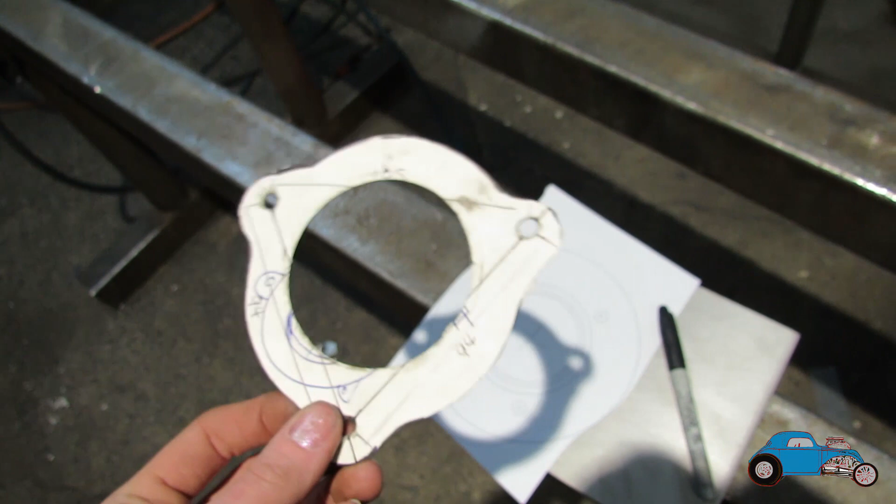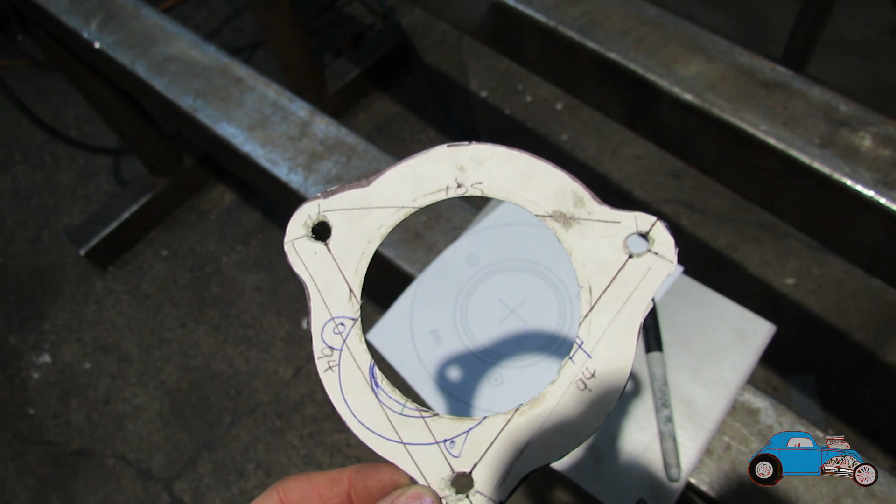I've just took a pattern of the turbo flange, just drawn it up on a bit of cardboard. The holes on this are actually slightly different, so we've got 94mm between two of them, and then we've got 105mm between these two as well. So I've just drawn this up and got it all on CAD, and I've got the drawing just here.

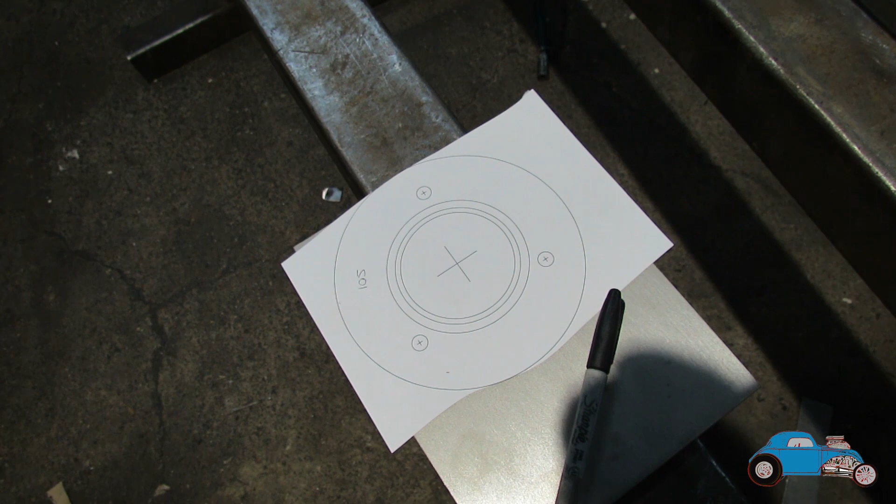I'm just going to copy this onto the bit of stainless that we've got, and that will make our turbo flange. I've also drawn into this a 90mm circle, and that will be the basis, or where we're going to put a bit of 90mm pipe on, and then we can machine the centre out. That will make sure that it's all central. So we'll just tack that onto the plate, and then we can put it in the lathe and bore the centre out to go over our flange on the turbo properly.

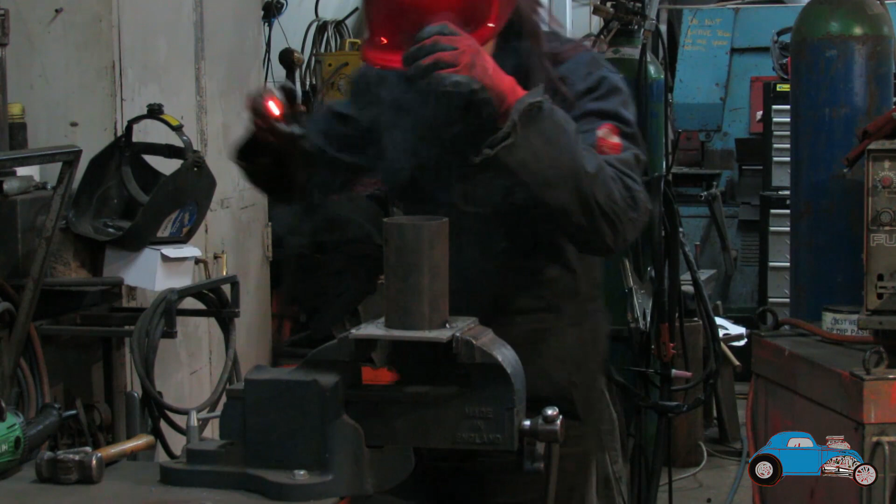That should hold it now so that we can bore the centre out.

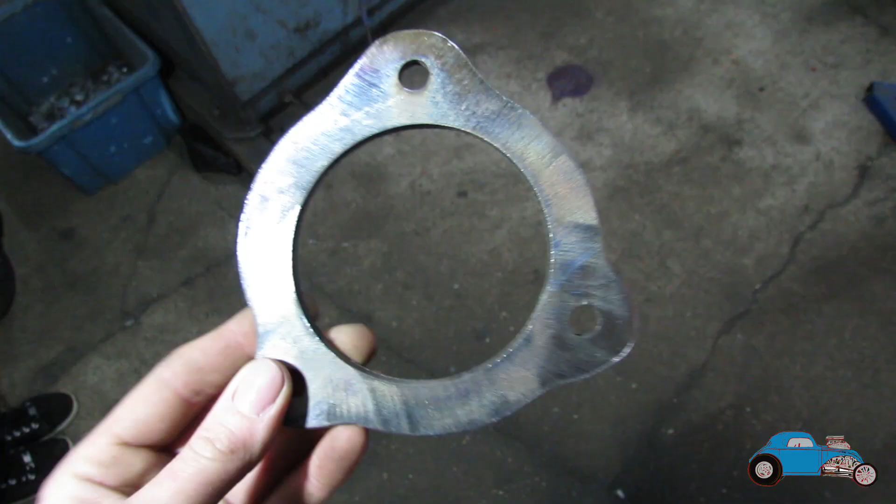I've got the turbo flange all bolted up now, and we've just been having a look at it, and we've decided that we just don't think it's thick enough. We made it out of 6mm stainless because that's all we had in stock, and we're now thinking it's probably not going to be thick enough because there was still part of the shoulder left on the stud when I bolted it up. I think what we're going to do is get all the exhaust and everything made up and together, and then get the exhaust fabricated, and then we'll have a new one laser cut.

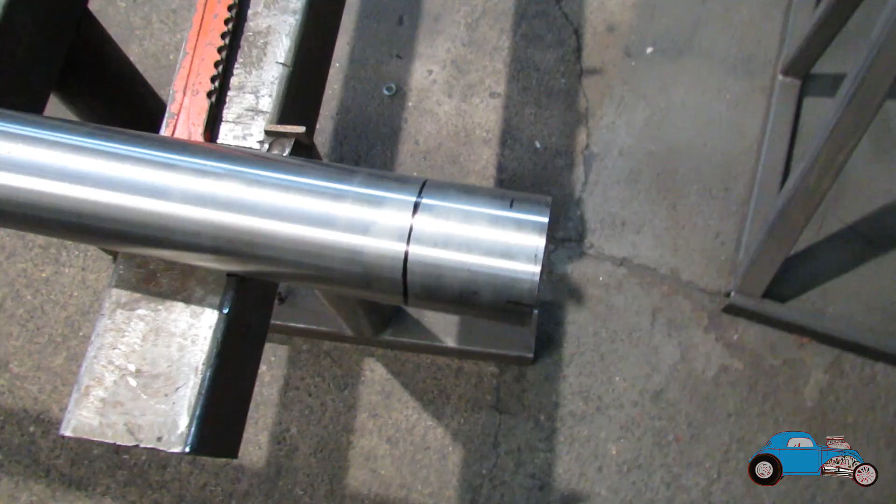Now we're going to cut the bit of stainless pipe. The size of the 3-inch is 76mm, and the hole in the middle of the flange that goes on the turbo is 80mm, so we've got a bit of a size difference there. So what we're going to do is give this a whirl, put this cone on here, and try to swell the end over, maybe press it. We'll see how we get on with that.

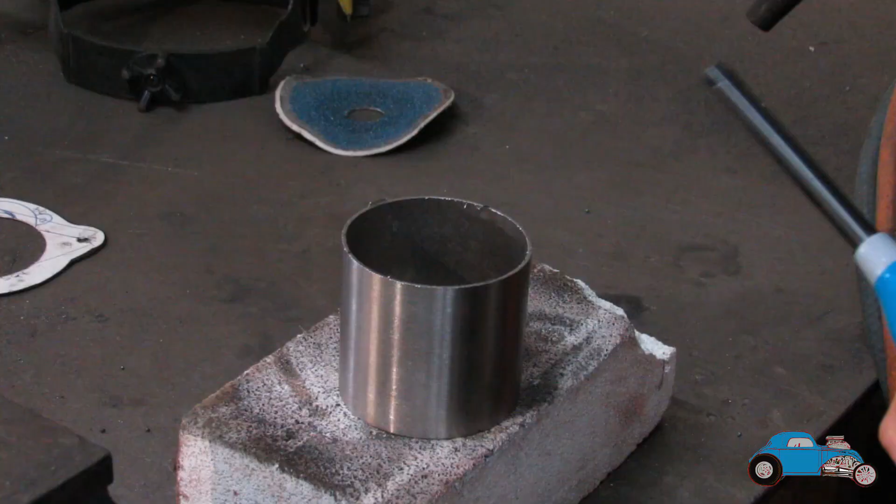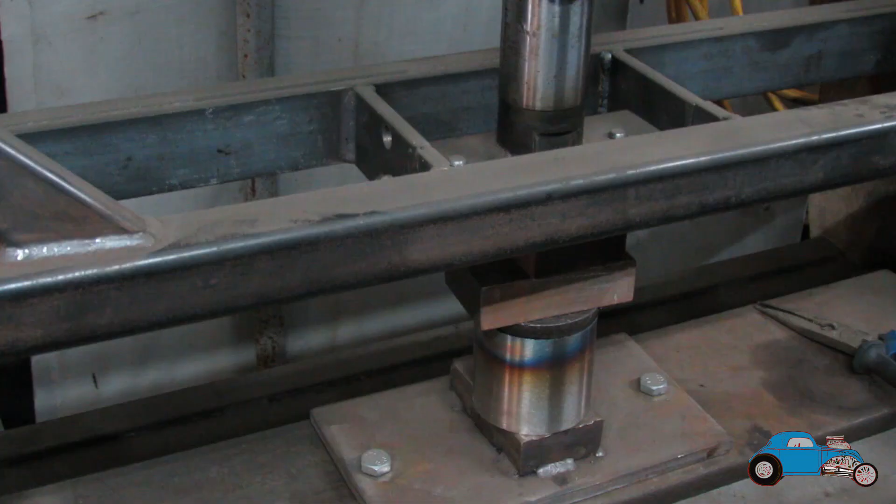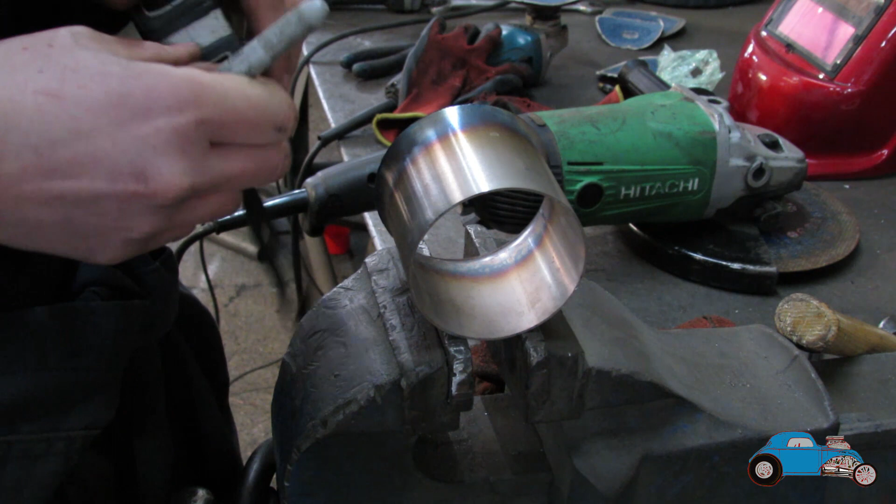Just checked it against the flange for the turbo and it all seems okay. So I think now I'm going to mark it out. We need it to have a bit more of an angle, so it'll bring it round towards the gearbox way, so it'll miss the steering column. We need about 40mm on the outside and 20mm on the inside.

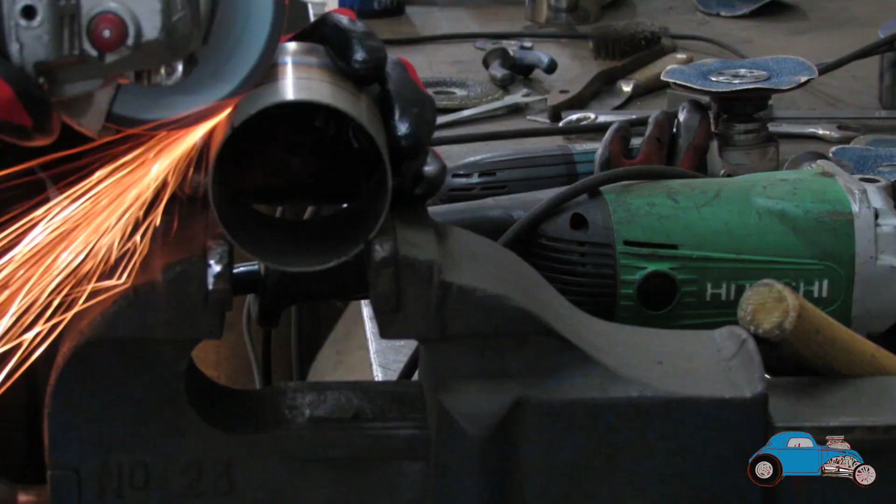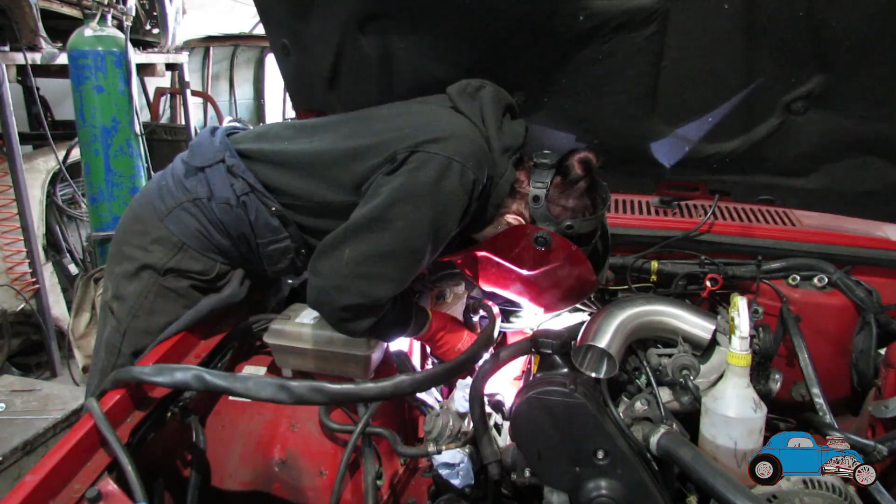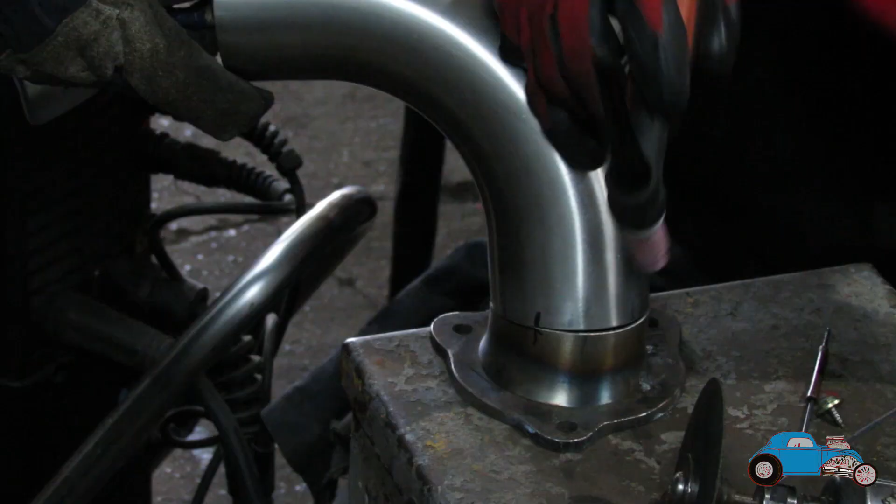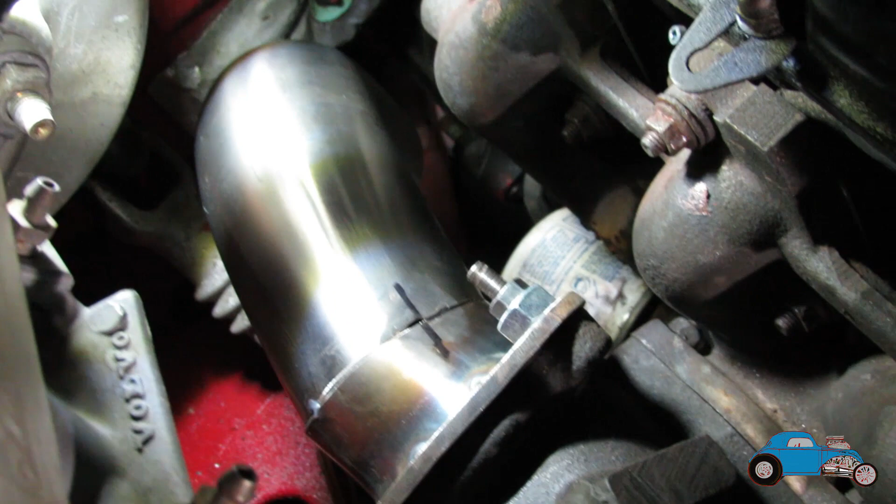Right, you're going to have to tell me where. That looks good to me. What do you think? That lines up, and there's plenty of clearance on the steering. Can't see from here, but as long as you say it's alright.

Right, so what's next then? Is it a bit of straight pipe, or is it... Yeah, we want to get the bend, get the other bend, then measure in between the two to cut the bit of straight pipe. Can we do that from underneath now then? Yeah, that'll all be underneath now, I should think.

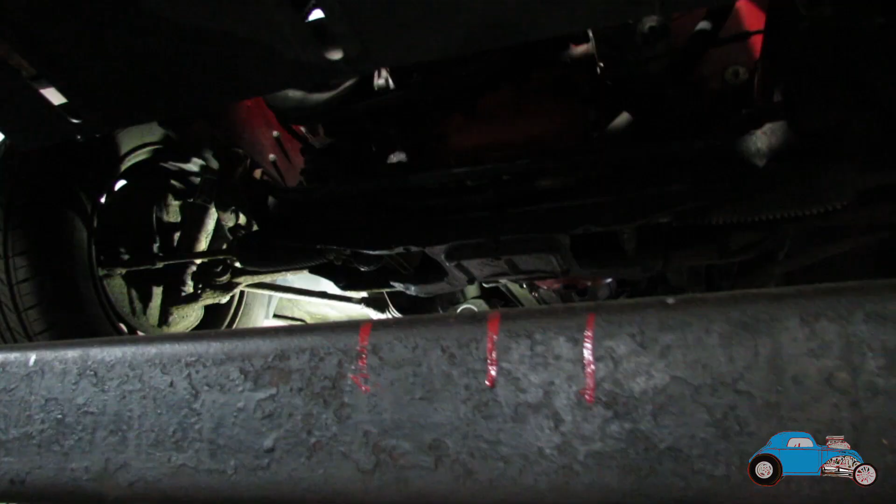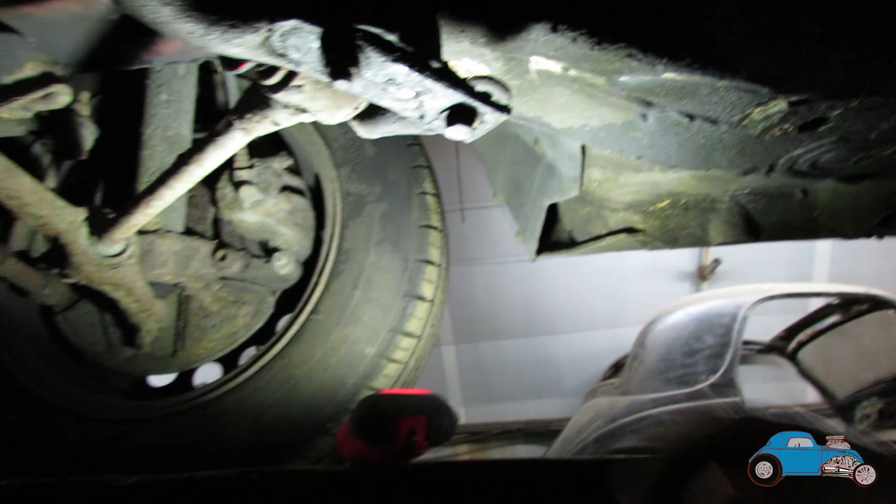So we're just going to explain quickly what we're doing at the minute. We've just got a bit of alley pipe and we're just getting that into place so that we can see roughly where the bottom bend is going to be. The next one is going to be from up there, from the down pipe to somewhere about here, and basically this pipe is just to give us roughly where it's going, so then we can cut a straight bit to go up into here.

Where are we putting the V-band? Here, we're putting it at the bottom, so the down pipe is separate, then a middle section, then a back section. Yeah, okay.

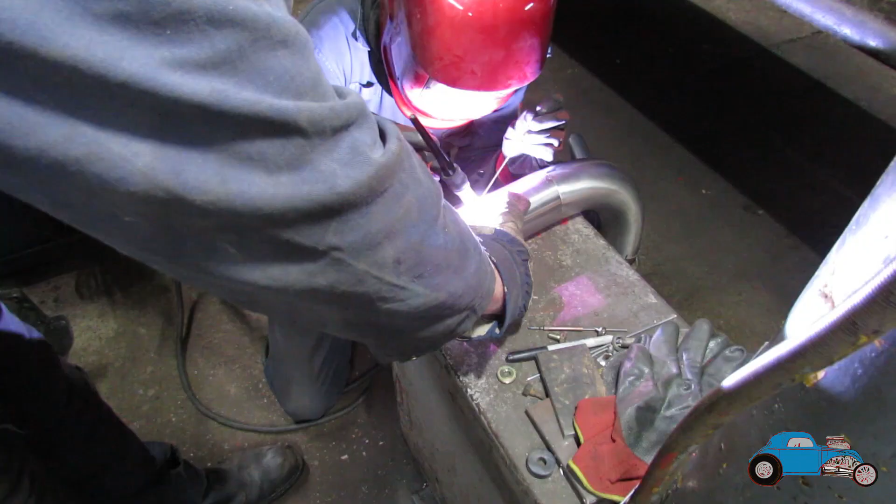Send that up here, 130mm, 65mm axle, yeah, and then our bar, like that, and then from the top of it to the axle was 130. 130.

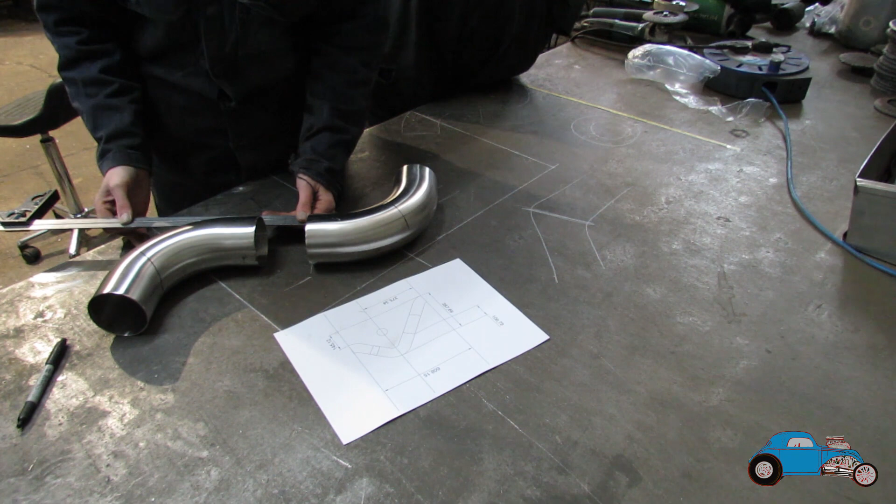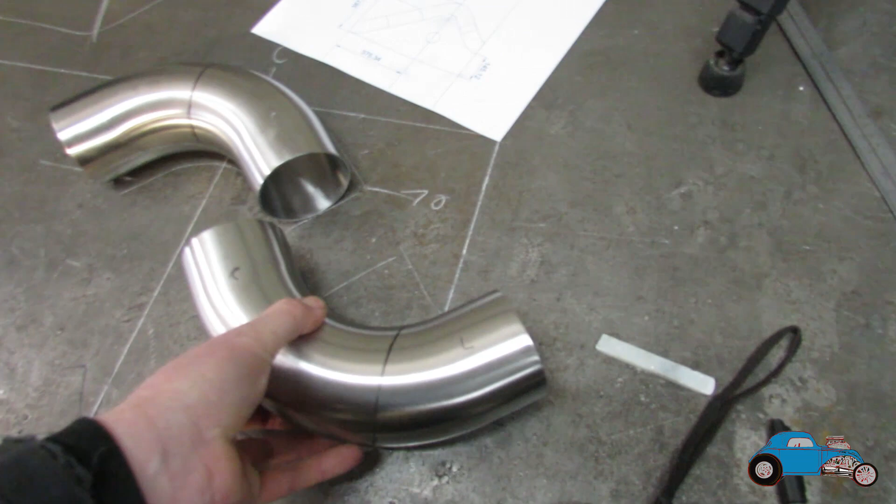Okay, we've now drawn this up on the bench, and we've now got to make this section that goes over the axle. So we've got this area, this bit here. We've now got a cut, a bend here, which we've got to trim this piece up onto. We've got another bend here, which we're going to trim the straight up, and then do the degrees and join up the straight to the bend. Then we need two straights now, 270mm and 70mm, so we can try and make this bit that goes up over the axle.

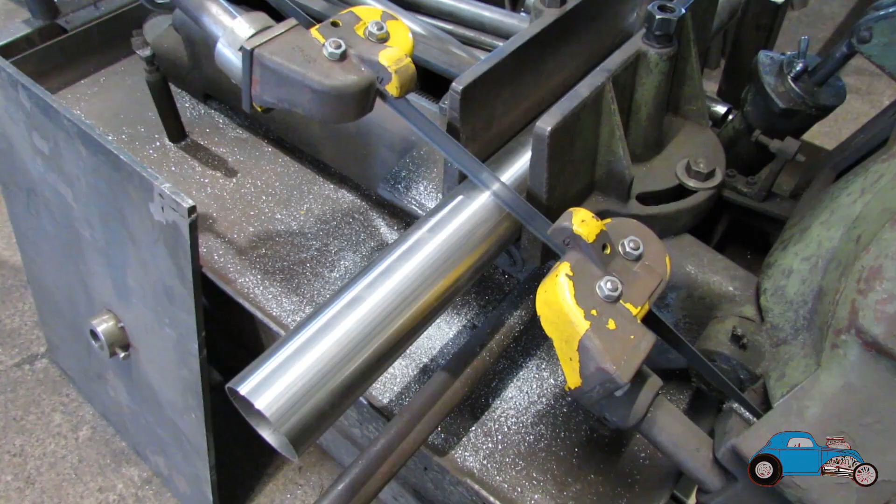Right, so it should look something like this. Next thing is to get this bit of tube cut down. I'm just going to get this in the vise and put the 9-inch through it, and that will give us this side and the other side as well. So then we can get it all tacked together, go check it up on the car and make sure it fits all right.

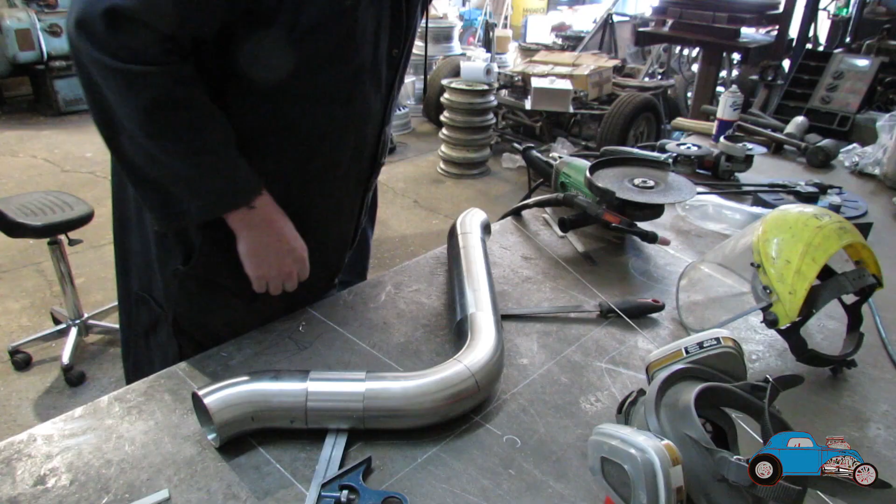Do you want to have a look? Yeah, tell me what you think. I'm now going to get it tacked together. Joints are good, are you good on that? Yeah, tack it together and then we'll offer it up on the car and see what we've got.

If you grab it from your side. Yeah, what do you think? I reckon if your end goes up just a smidge, I reckon we're there.

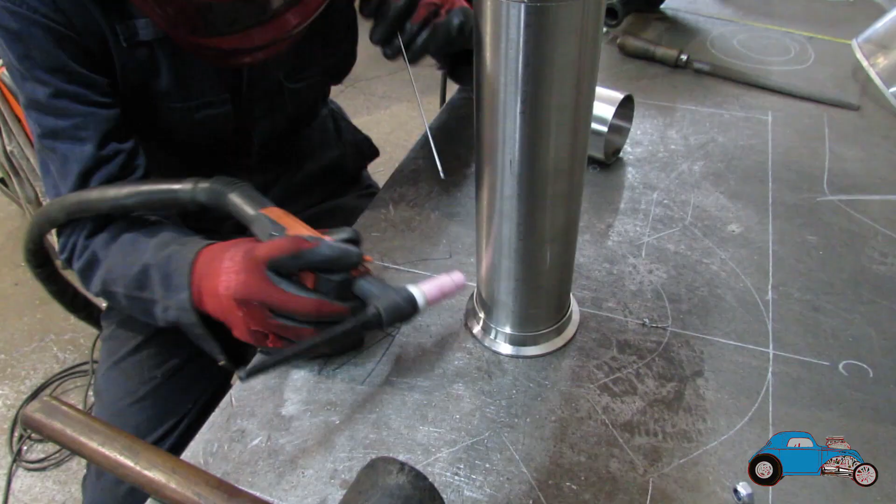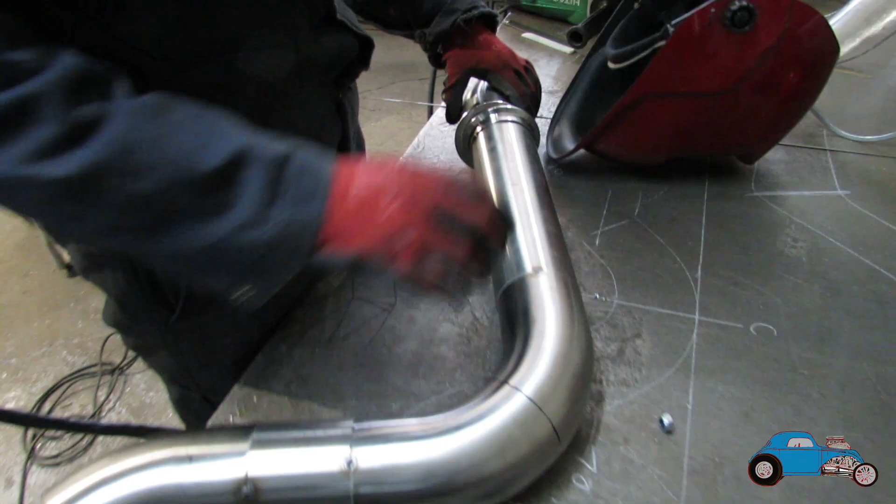Should now be able to put that in there.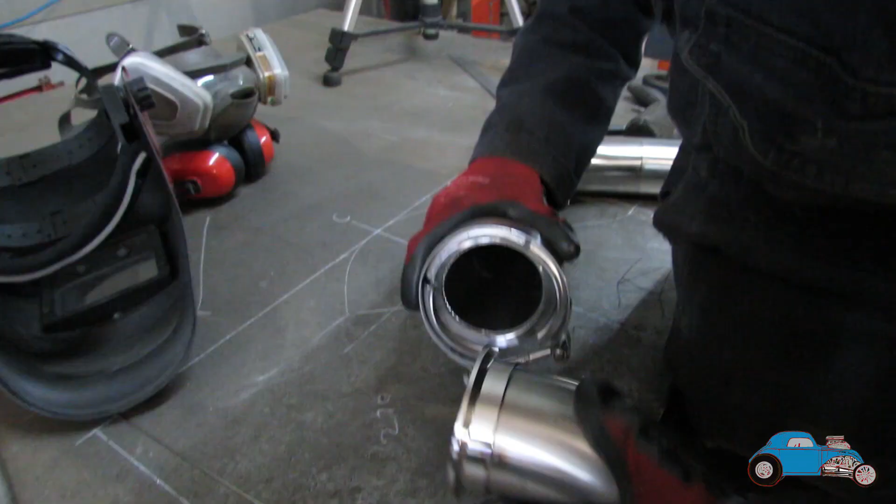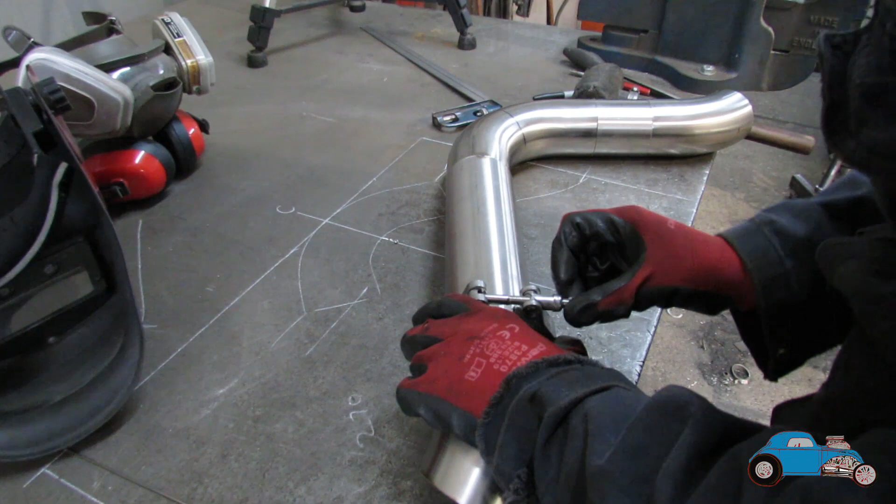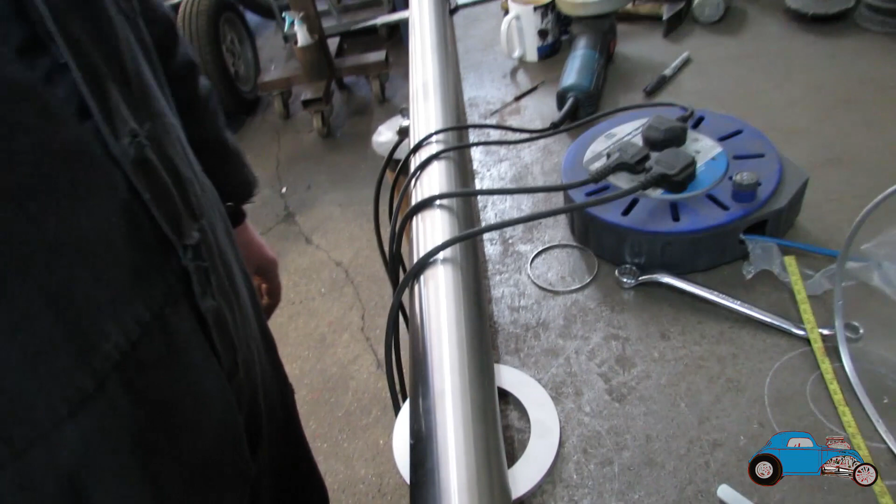That should, 2 metres will have enough. 2 metres, yeah? Yeah, we've just tacked the long piece that we cut, the bit that's 2 metres, onto the bit that goes over the axle with the V-band. We've just tacked it on. We didn't film a lot of it because it's quite hard trying to juggle it all, wasn't it? As well, yeah, so we've just got this all tacked on, same as before.

We're now going to go put it up against the car, and once we've taken the V-band off, take the two separate pieces and go check it up against the car. Yeah? Yeah, we need to leave the V-band on really, don't we? Well, no, because you're going to get it over the axle. I bet that end will go over the axle. Well, we can try it.

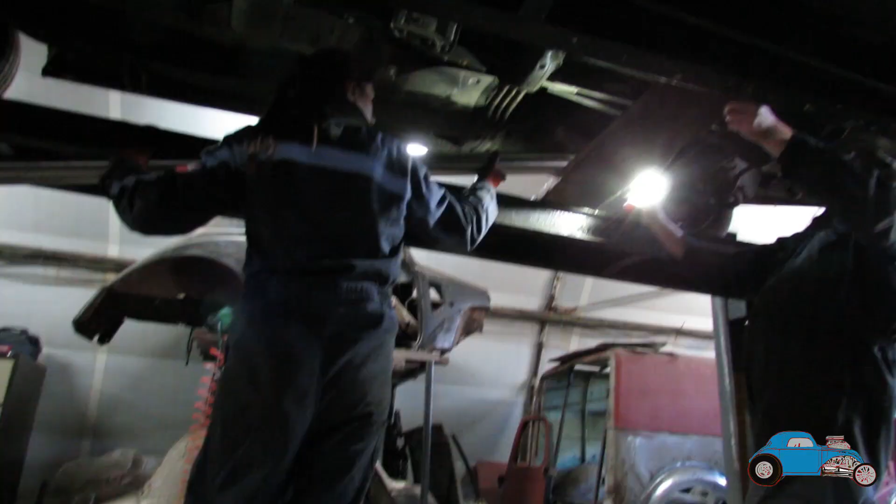I'll tighten this up. Alright, we can try it, but it might not go over, but we'll see, won't we? So we'll take this up there and then we can put it up against the car and check that it's alright. Yeah.

So where we're at now is I have just tacked the first V-band from the downpipe to the middle section of the exhaust. I've just tacked that all together and got it all bolted up. And we've got the piece over the axle up here as well. Now, because we haven't got any mounts done yet, I've just got an axle stand holding it up, but there is a bit of flex in some of the tacks, so there is a little bit of movement in that.

So I know that when I actually put it into place, it needs to be 150mm from the top of the axle to the bottom of the exhaust tube. So where it will sit will be somewhere around here.

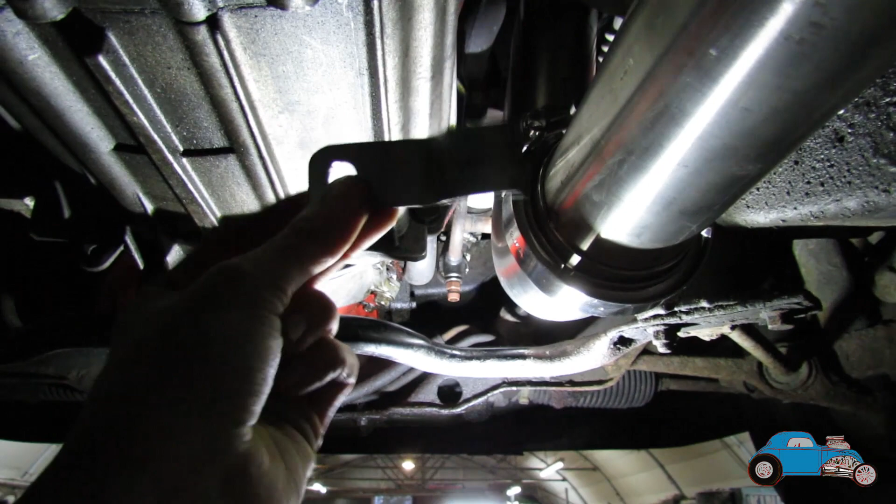So I think I'm now ready to start making the mounts. I have made one of them already, which is just this one at the front, just there, and that'll bolt on to the gearbox and then just goes round the exhaust tube.

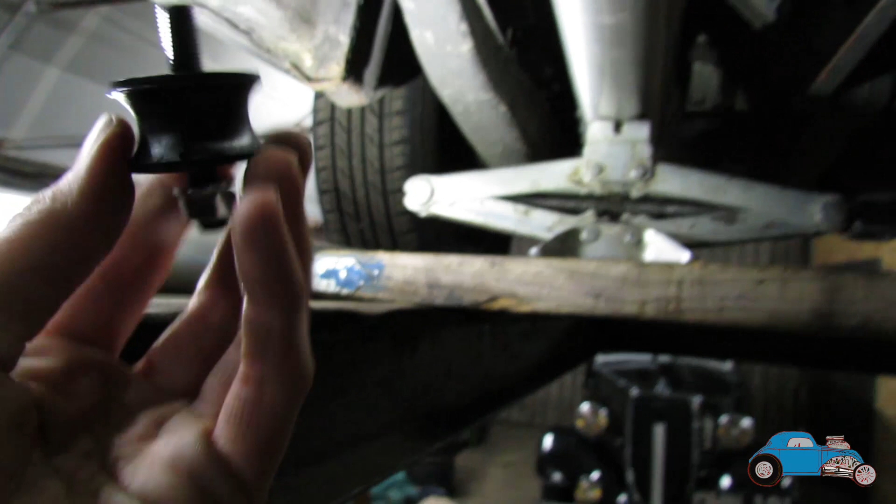I've just marked on the floor where I'm going to drill it. I've checked inside, there's nothing in the way, so I'm just going to drill a little hole in the floor and bolt this up, and then I can make the mount off this.

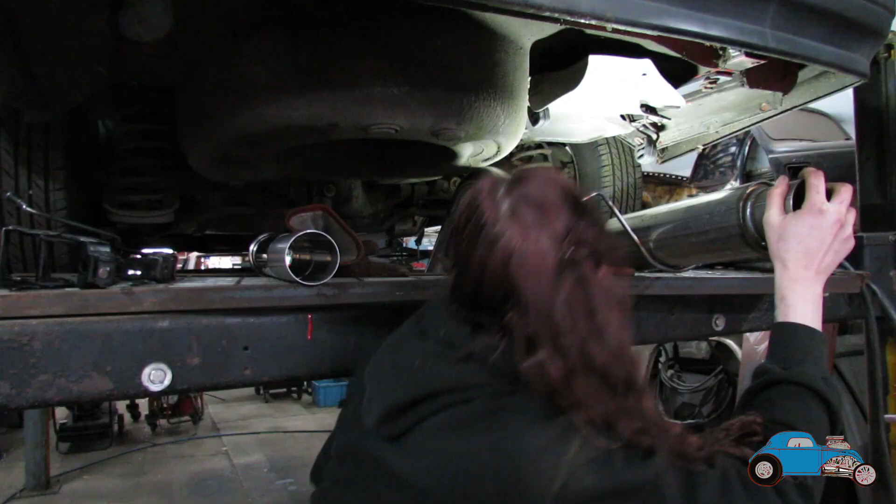Got it? Yeah, thank you.

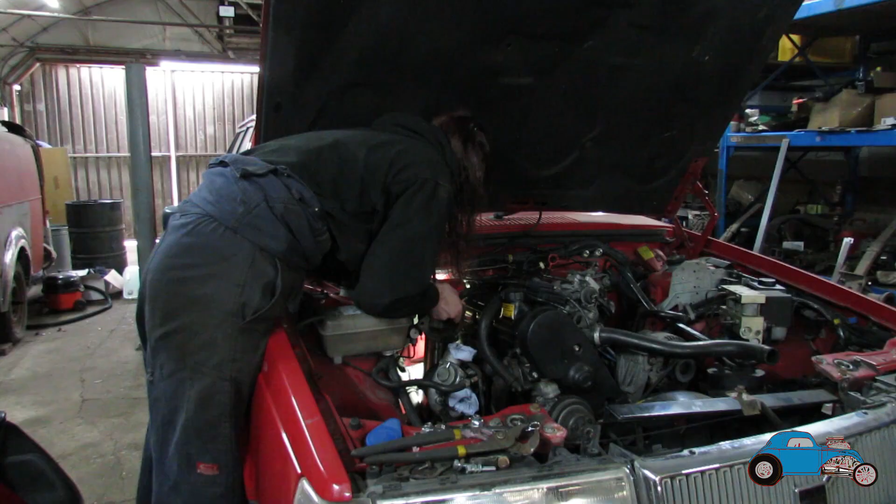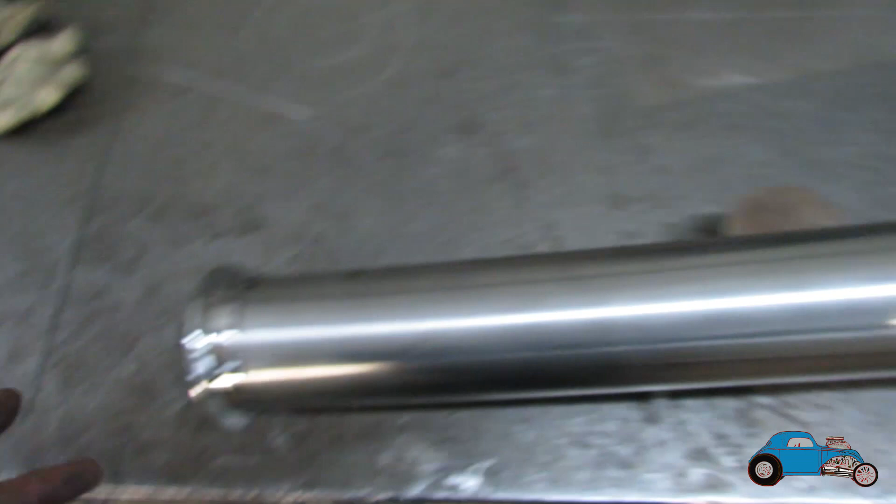So I think I'm now about ready to start getting the exhaust welded up. I'm just going to start on this V-band on the middle section, try and get as neat a weld as I can around that. There's not too many to do on this bit, there's more on the bit that goes over the axle, so that'll be when it takes a lot of time. So just going to get this bit all welded and hopefully it goes well.

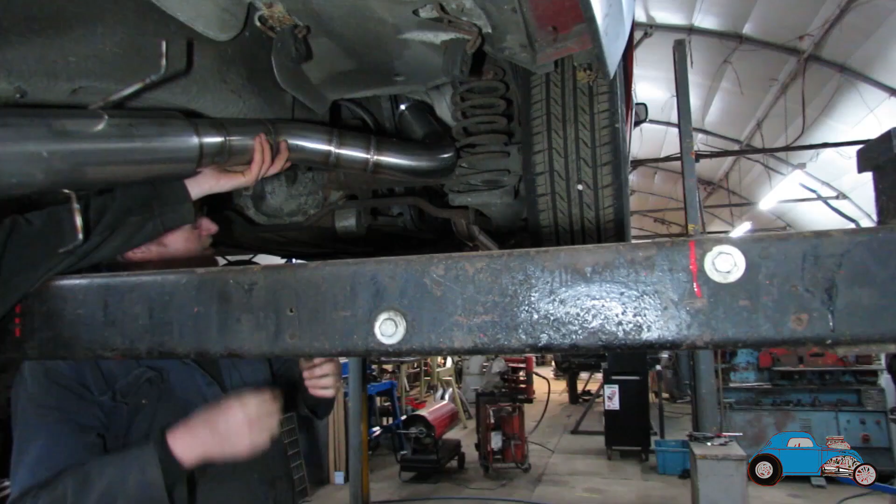Yeah, yeah, right, now put that in. Oh my god, that actually fits really well. That's actually quite shocking.

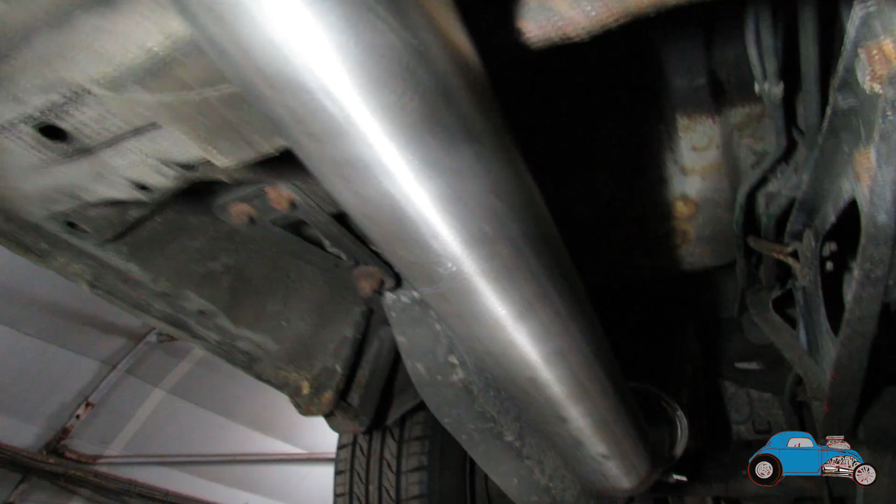That's the stainless exhaust back on the Volvo 940 drift car. We're really pleased with it, welded up really well, and all the gaps and clearances are all really good. So we're just waiting on the bosses for the AFR gauge and the lambda sensor, and as soon as they arrive we'll get them all welded in.